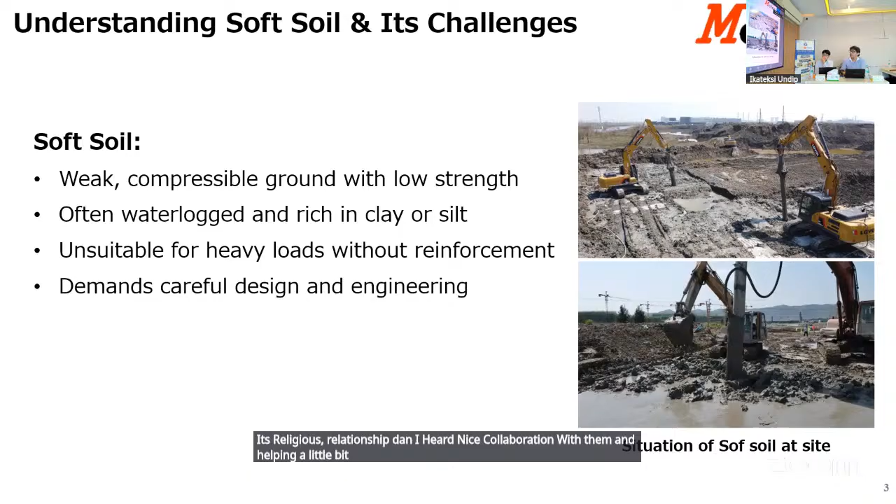And I heard from Beta, who are our nice collaborators and are helping us a lot, that Indonesia has a lot of soft soil all over the country. So we thought it would be a good opportunity to speak about it. Next, there are key challenges in building on soft soil. The first one, low bearing capacity.

And the second one is, if it's low bearing capacity and we build something, then there will be the settlement issue. And then there is soil instability. And of course, impacts on the construction.

There are many people from different companies, construction and consultants. I believe so. I hope so.

And there is a problem of cost. If the project is delayed, there will be cost overruns and durability issues, client issues, and issues with the people and society around. So we need to fix those issues so that these kinds of accidents don't happen on the site.

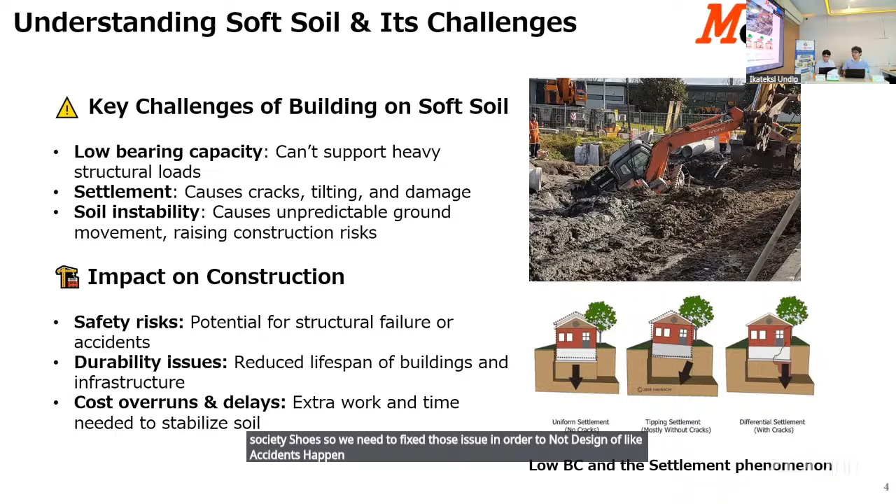Now we move to the DBox. So what is basically DBox? DBox is basically a reinforcement product to strengthen soft soil. And how it strengthens the soft soil, I will explain briefly in the next slides. It's basically binding the soil particles together.

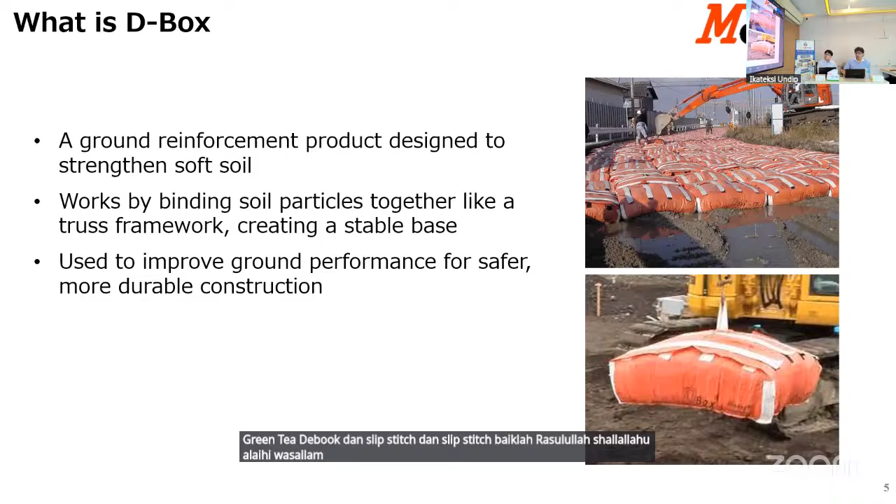The truss framework: if you see on the right side, there is a DBox being lifted by some equipment. There's a truss band inside, and it binds the material. And it's used to improve the ground for safer, more durable construction.

Then what are the sizes? There were many sizes before, like the L size and the S size, but now we mostly prefer the LS100 and LS150. The material is polypropylene, and the truss band is made from nylon.

As for durability, we cannot use it a second time. We can use it, but in Japan we don't recommend it because it will not be 100% efficient. It can be used at 80%, but we don't recommend it. We should use it only one time.

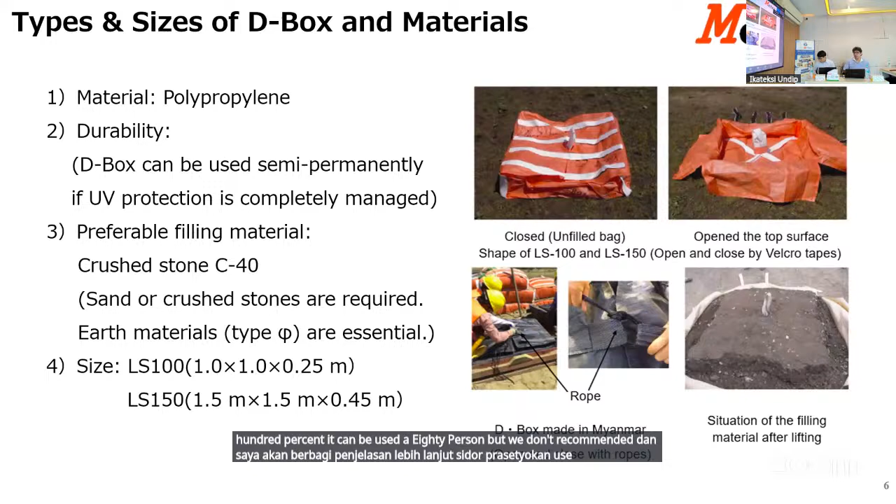And for the fill material, crushed stone C40, sand or crushed stone you can use. And the material is this one; if you look on your right-hand side, you can see it.

Then what are the benefits of the DBox? Basically, it's reinforcement for soft ground. And the important thing is it reduces settlement, and we can achieve the settlement very early. We can save time in achieving the settlement.

The other thing is vibration reduction, because there are many vibrations from machinery, from traffic, and earthquakes. So we can really reduce the vibration with the DBox. And if you have an earthquake zone, liquefaction happens: when the earthquake comes, the water comes out from the soil because of the weak clay. That can also be prevented by the DBox.

And then frost heaving, maybe you are aware of it, happens in cold areas when the season changes. I'm not sure, maybe you have cold regions in Indonesia. So we can also use it there for roads, embankments and retaining walls.

And one more important thing is it's environmentally friendly, because, as you know, there are many methods to stabilize soft soil: cement, PVD, but the cement one is not environmentally friendly and causes many problems. That's why we use the D-box.

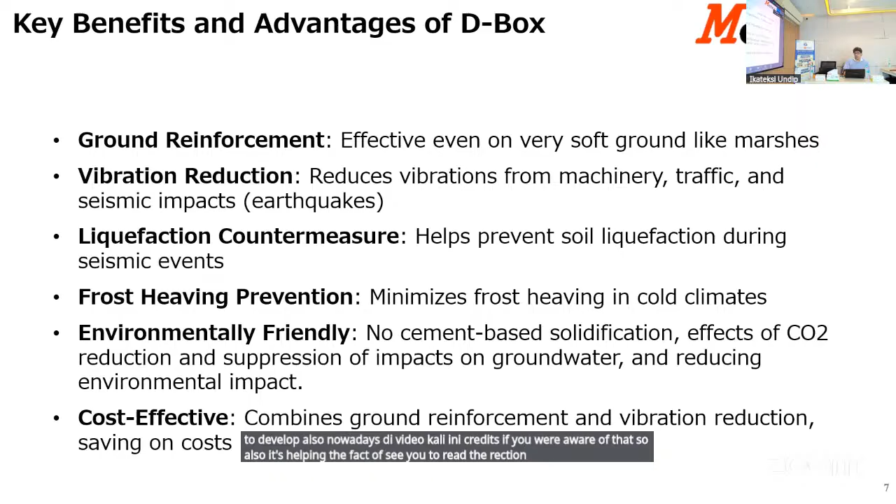Nowadays the world is focusing on CO2 credits, if you are aware of that. So it also helps with CO2 reduction. And then it's cost effective; in the long run, it's very cost effective.

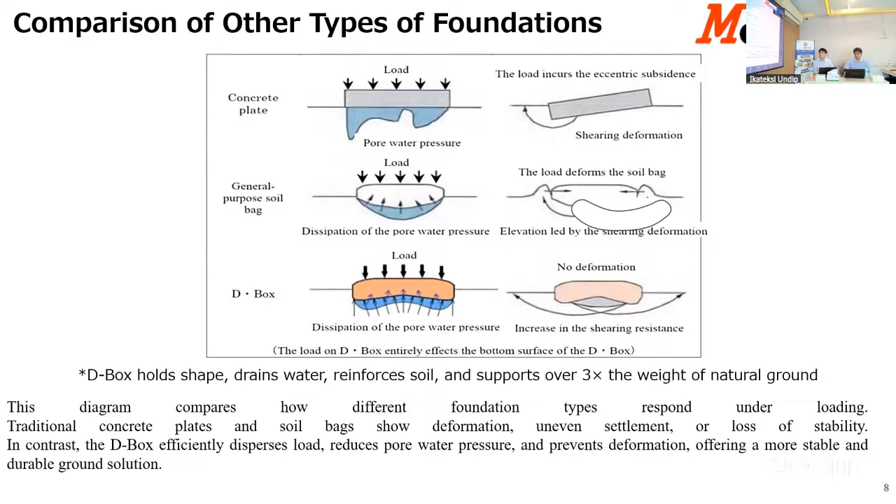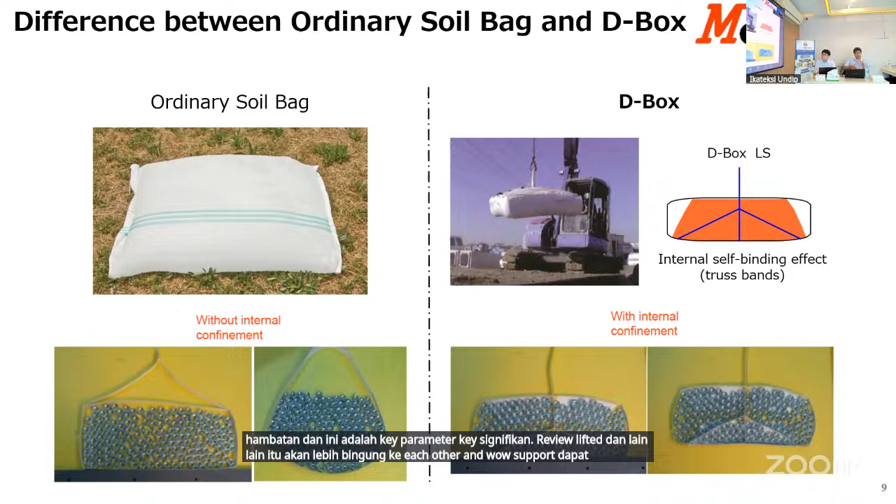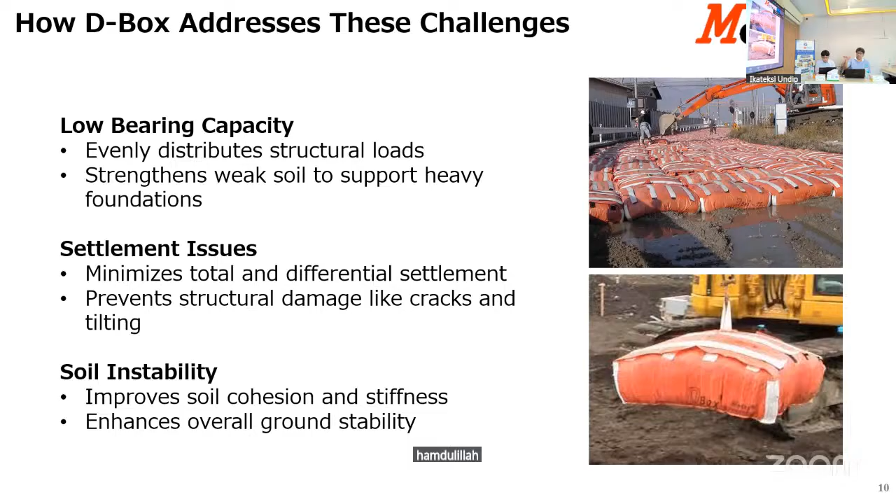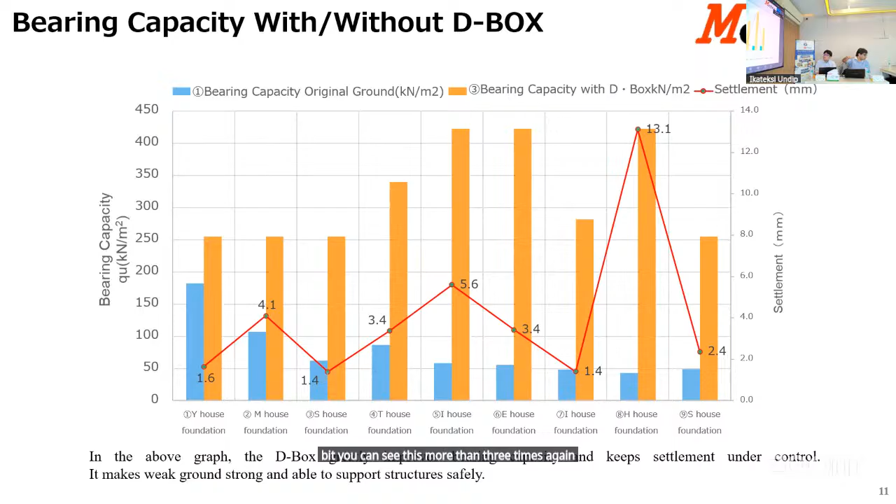Then technically, as I explained in the previous slide, if you see this graph, the blue one is the bearing capacity of the foundation or the ground before placing the D-box. And the yellow one is the bearing capacity with the D-box, QAD. So you can see that it's more than 3 times, somewhere it's 2 times, but the bearing capacity is very high in the case of house construction, like residential construction. So it's very good for house construction as well.

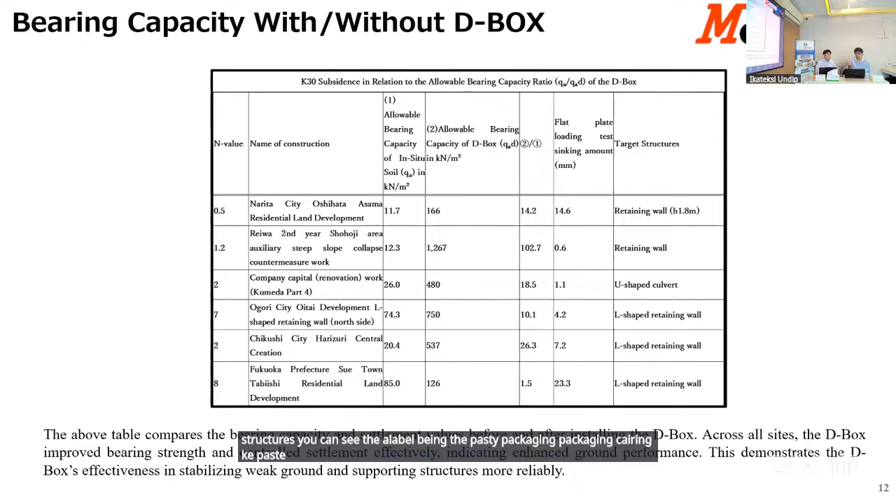And then another example, for the retaining wall or other structures, you can see that the allowable bearing capacity achieved is more than 3 times. So it's very good in achieving bearing capacity, and also for the settlement of the ground and supporting the ground. Then there are applications like road subgrade, parking lots, drainage channels, retaining walls, and water tanks. We can use a D-box there.

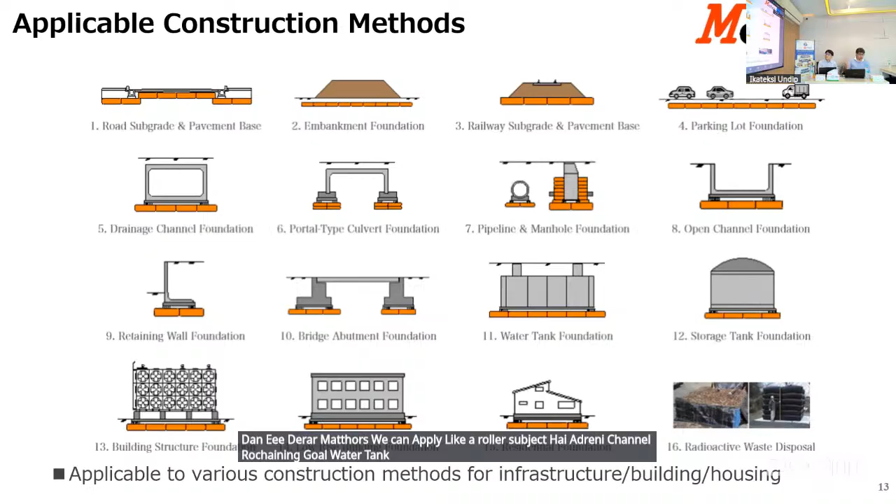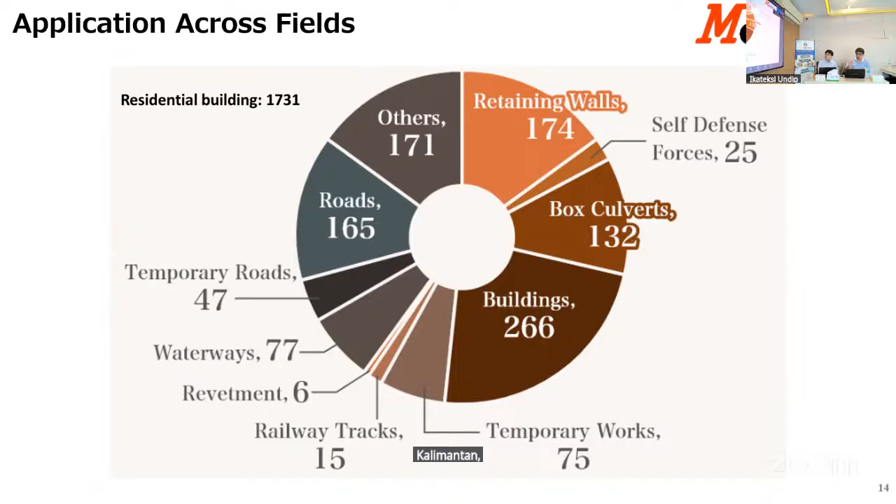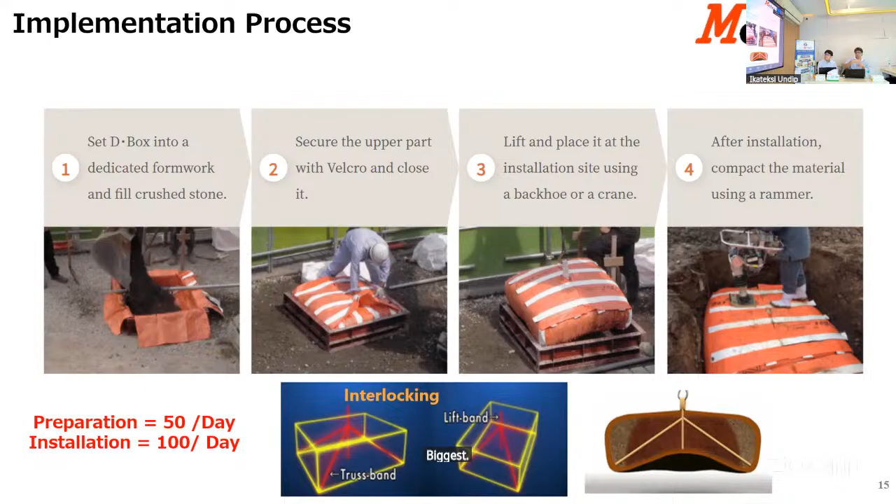And then how to do that? It's a very simple process compared to other methods, because those need a proper technician and proper teaching. But in this case, we just need a D-box, a polypropylene bag. Then we put the proper material in it. Then we grab it, lift it with the band, and then compact it. So the truss band will be there. Like this.

And then this is a small video for you. So please watch this. Maybe it's a recap. Can you hear it? No, sorry. What should I do?

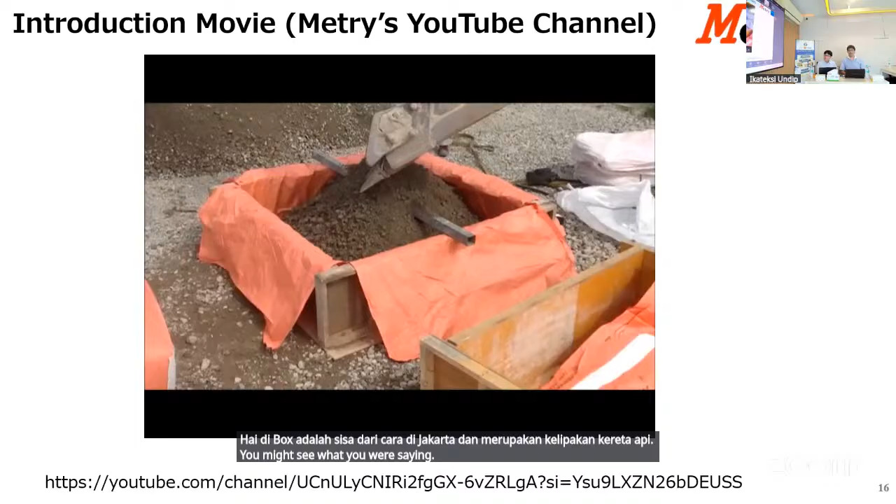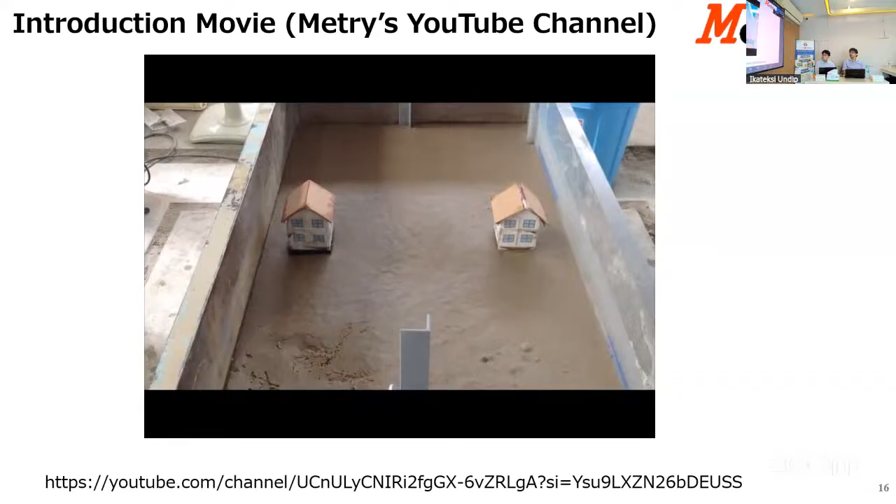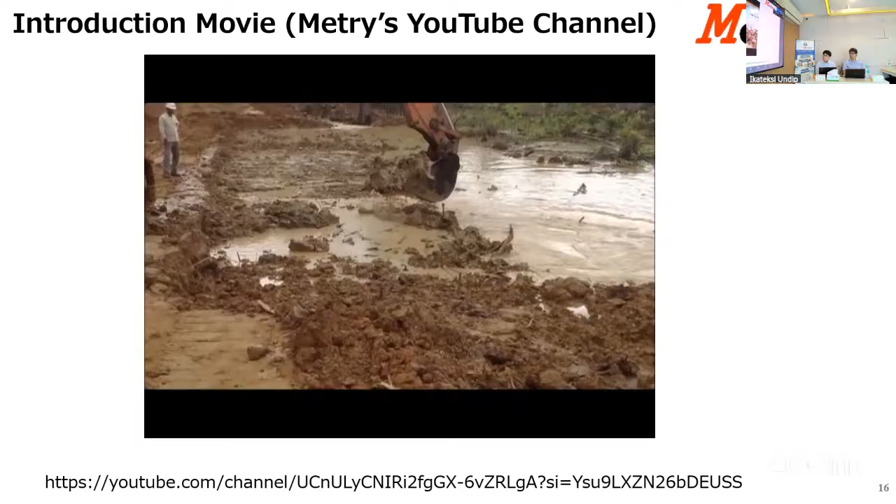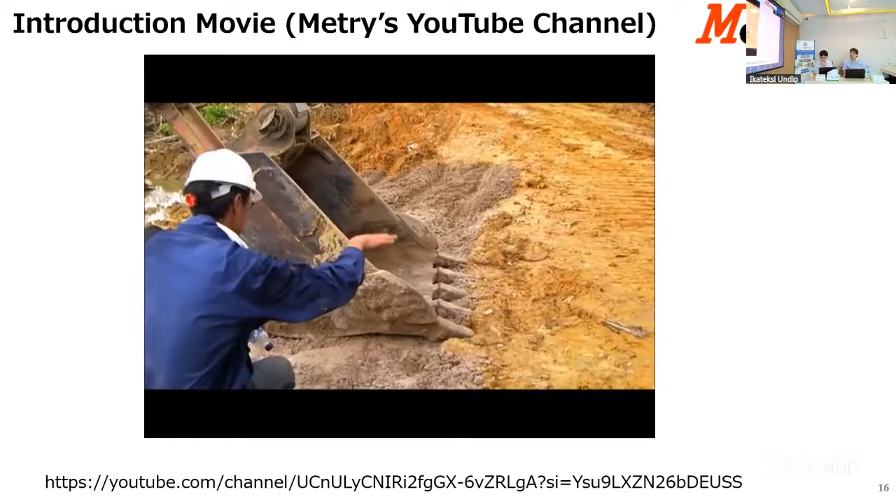You're on mute. Sound... no sound. Is it okay? Yes. Okay, sorry. I think you were listening to me, the online participants.

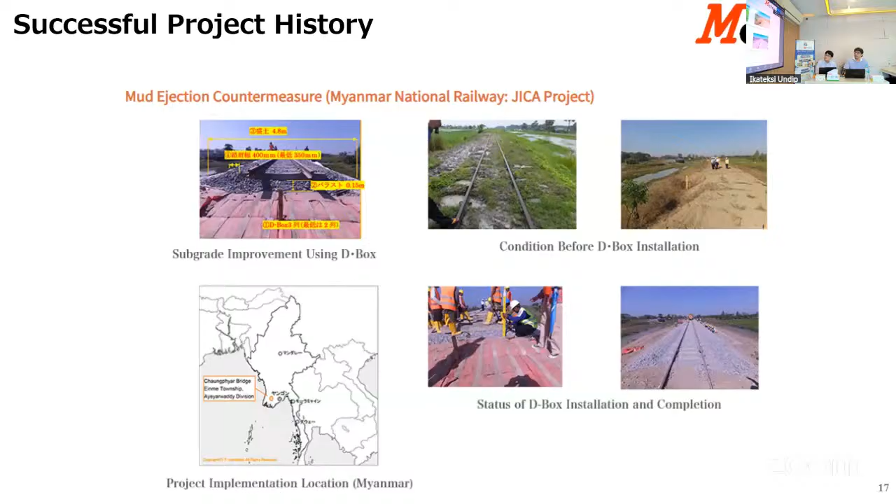So now I will present the successful project history of what Metry did. We have Myanmar, with the railway project we did there. And then, as I explained, we also did this project in Kalimantan. It's a short project, just 2-3 days in Kalimantan. And then there's ground reinforcement work using D-Box for the road base of a bypass highway on soft ground.

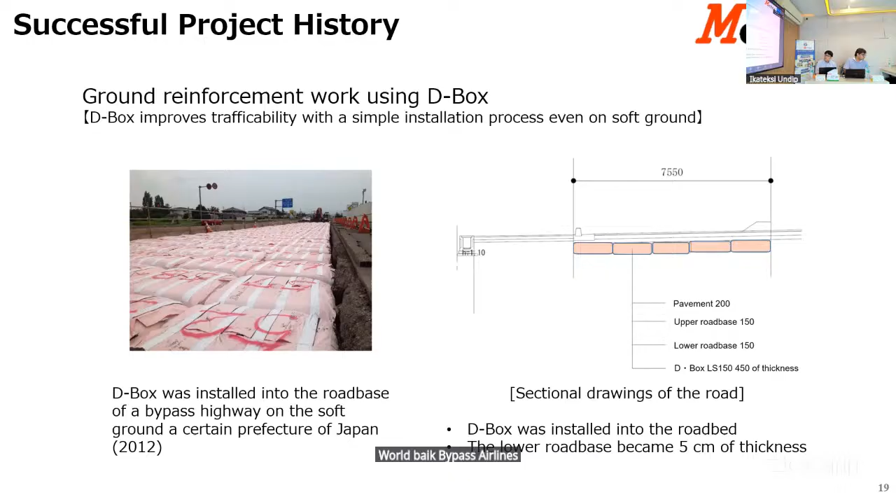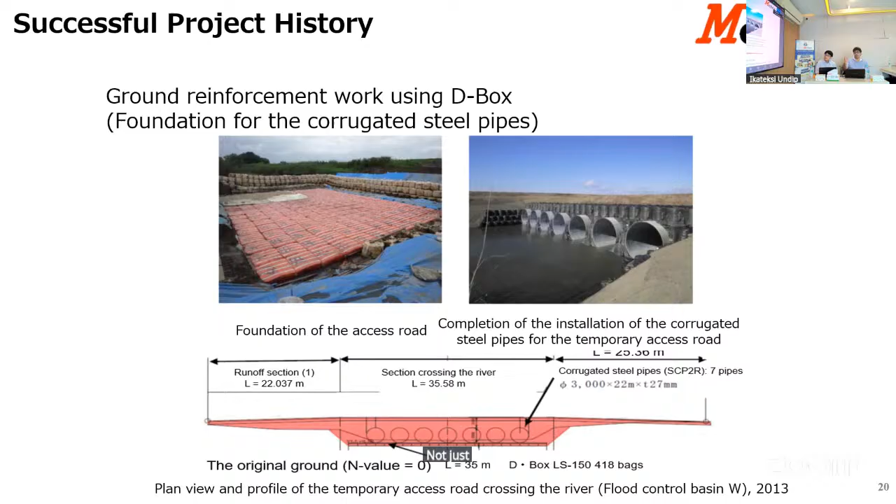It's in Japan. And this is also in Japan, using a D-box foundation for corrugated steel pipes. It was not so stable, so we used the D-box. And then, as explained before, to control vibration for the residential area and for the people, we use the D-box. It significantly reduces the vibration.

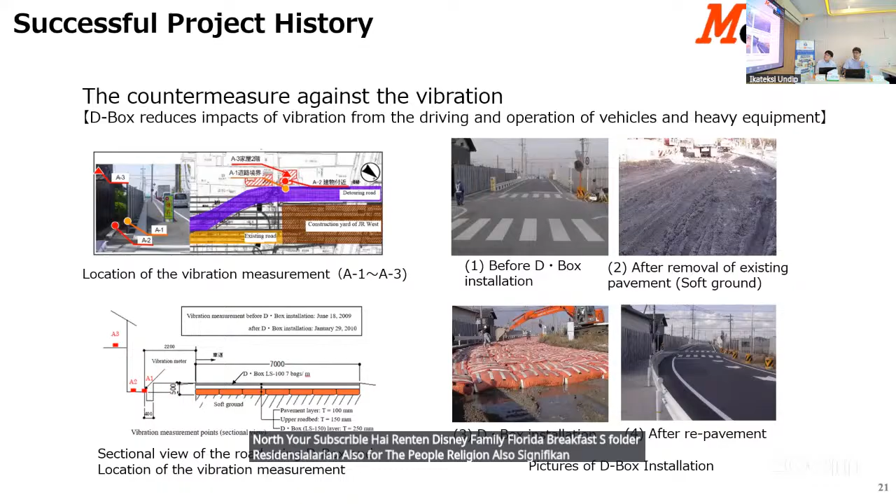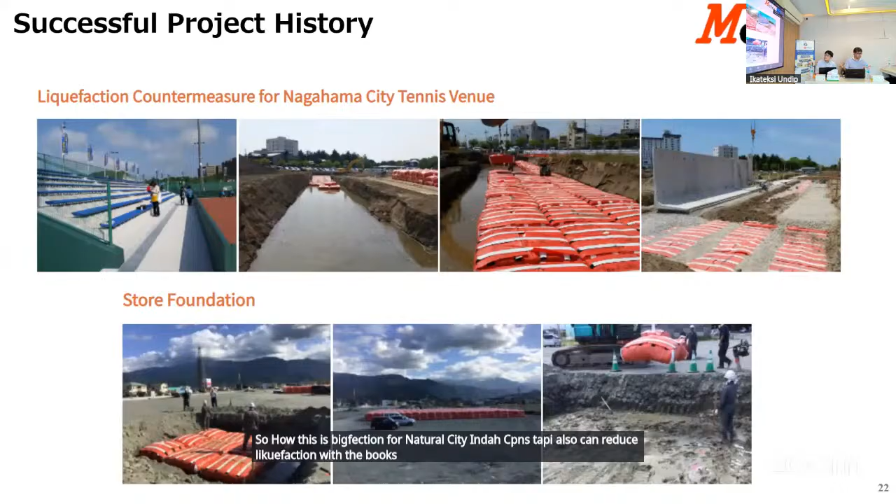So I studied from Nagoya University, in Aichi prefecture. There was some project there.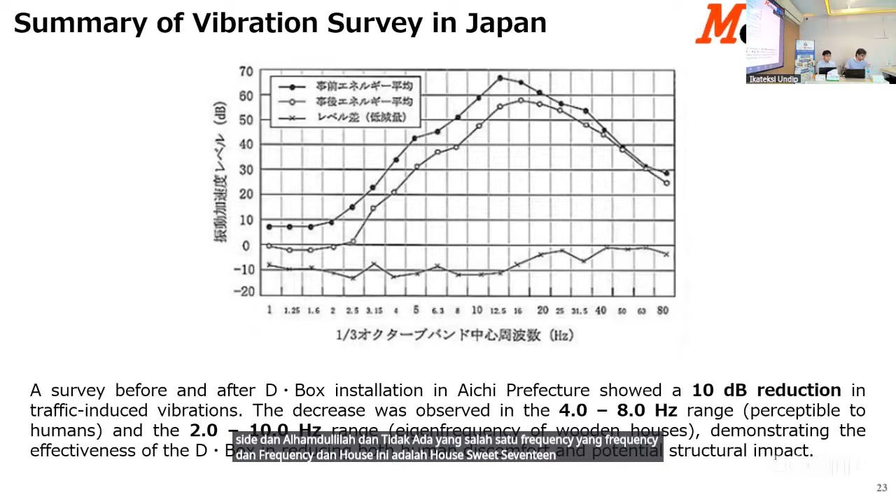When they installed the D-boxes, there was a 10 dB reduction at the frequency where humans can hear the sound - a very good reduction just from putting D-boxes in the soil. It also decreased the 2 to 10 hertz frequency, which is the eigen frequency for houses, causing them to vibrate and make sound. So this was also reduced. D-boxes are not just effective for settlement, they're also effective in reducing vibration.

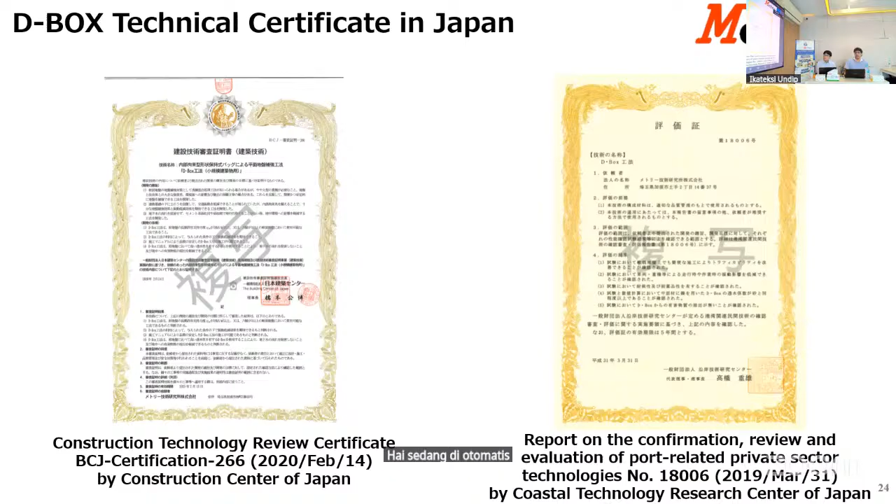And these are some certificates they got in Japan. Maybe you are more familiar than me with these kinds of certificates.

So that's it from my side. If there are any questions, please, anything is okay. Thank you so much.

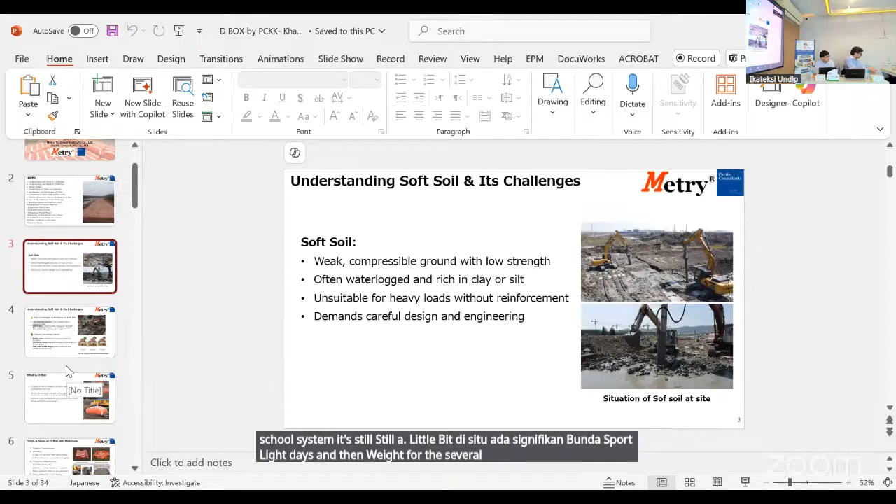So for the base soil, what do we need to do to it? We don't have to do anything - that's why we use D-box. We just put the D-box in the soil as it is. We don't do anything, because if we do anything, that defeats the significance of D-box. We just put it like this and then wait for the settlement, and we don't even need to know the parameters of the existing soil.

Of course we know the soil - we know the N value, we know the C value. If we know it, then we can apply this. We definitely know that, but mostly N is 0, 1, or 2. That's why we just put it as it is, and then observe the settlement.

So now we are working on Narita airport in Japan, the runway, and the total settlement design there is 4.62 meters or so, because it's very, very weak soil with a lot of water - 700% liquidity index they mentioned, a lot of water. What they suggested was cement stabilization, but the client said it's an environmental issue, so please use another method that's cheaper. In the long run D-box is cheaper, but in the short run cement stabilization is easier. Then they suggested D-box.

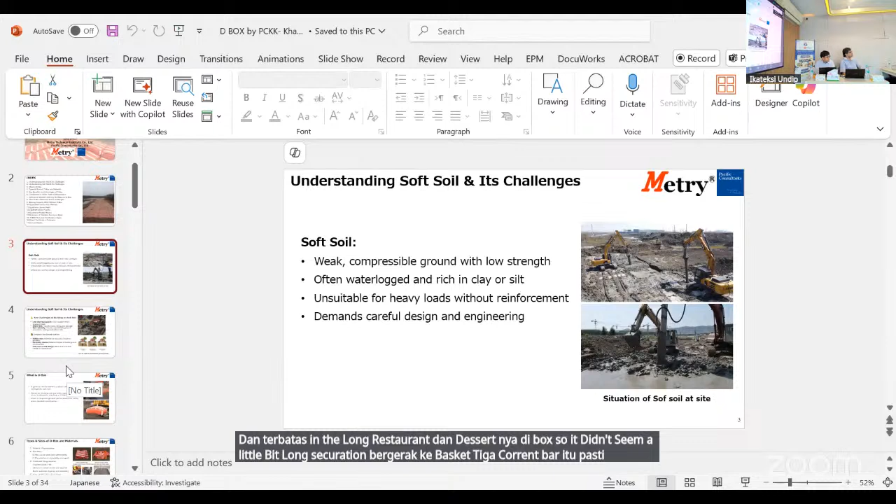It has a design we cannot discuss now, but 1 layer, 2 layer, 3 layer depending on the situation. If we put 1 layer, it gives bearing capacity 3 times the current bearing capacity. And if we put another layer, it will be more - that's the design calculation.

There's a question. Is there any requirement for material inside the box? And second, is there any pre-treatment for soft soil condition before we install the box? If any project portfolio in Indonesia would be favorable. How can I see the question? About the chat.

As I explained, there is a requirement like C40, it should be crushed stone 40. We cannot use clay, but there isn't a strict restriction - we have to customize according to Indonesian needs, but the time will be different. For example, with C40 it might need 1 day to achieve settlement, but if we use sand or clay it might need 3 days. So the permeability is different - we might need the same material, but we can go with sand and silt. That's something we have to discuss and customize according to Indonesian needs.

The second question was about pre-treatment. I think it's the same discussion we had - we don't need pre-treatment. It depends on the depth of the soft soil. If it's more than 5 meters, we go for pre-treatment, but if it's 3 to 4 meters, we don't need any pre-treatment. We can put it as is, whatever soft soil and however much water, we can go without that.

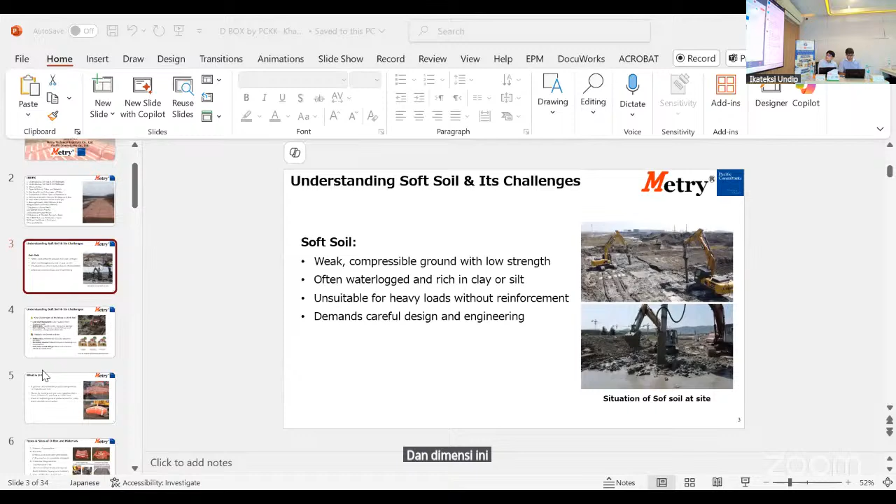It's a very easy way to make it. It's not a complicated technique. We need a D-box, and then we put the material, wrap it, and do proper compaction. That's it. It doesn't need so much labor.

There's another question. Is there any standard dimension of the D-box, or does it depend on the soil condition? The second question, is it applicable if we want to use D-box on a previously mangrove site?

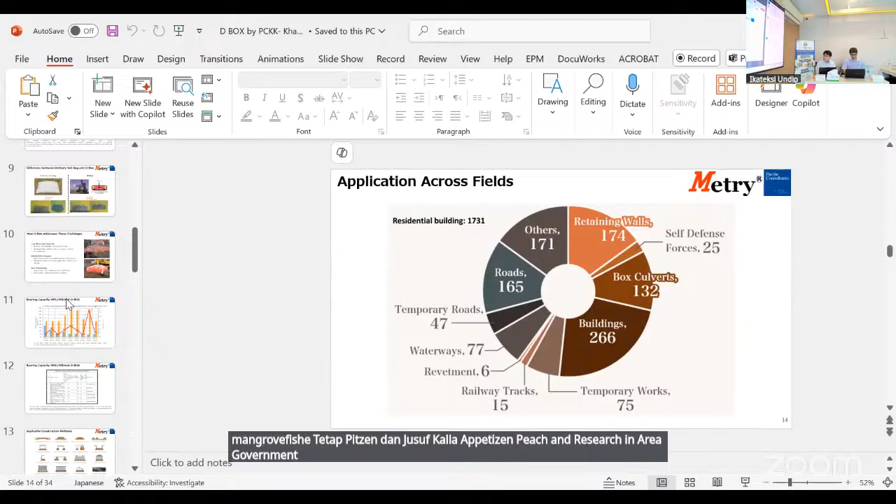What is mangrove? Mangrove is vegetation that usually grows on the coastline. A peat, you mean peat? Yeah, it's in the area. Different, yeah. Mangrove is vegetation that is on the shore. Rawa itu tanaman di rawa itu apa namanya? Very peat and very soft. Mangrove, tapi kan itu rawa kan itu. Tree on the shore, okay, yeah, tree okay, on the shore.

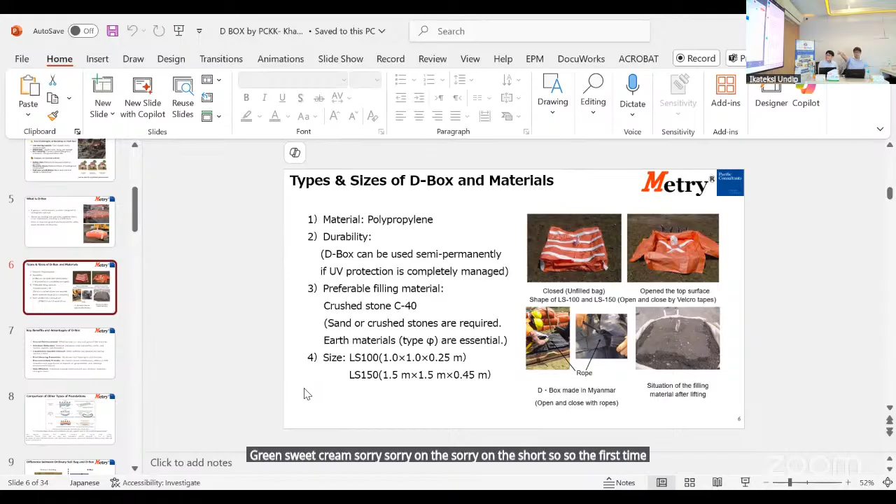So the first question, the answer is on the screen. We have proper size for the D-box, and mostly we use LS 150. If the site has an N value of 0 to 2 and it's very soft soil, it doesn't matter how much water content there is, it's okay. We can use D-box, but it depends on the depth. If the depth of soil is more than 5 meters, it's difficult. We need to think of another approach before we can put the D-box. Thank you for the nice question.

And the second one, about mangrove. Yeah, we can use it, as I already answered. It depends on the depth. If the depth of that soil is too much, like 5 meters or more, we need some protection. But definitely we can use that. This is probably related to mangrove.

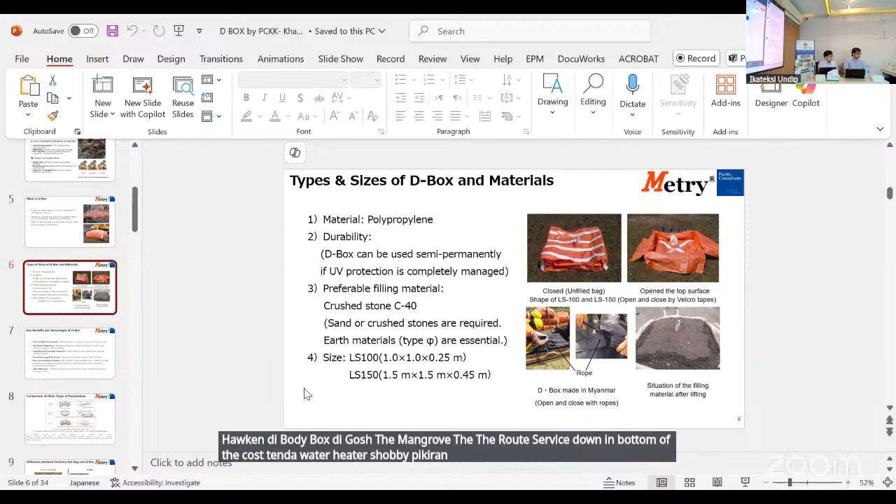If the mangrove is along the coastline, how can we put the box, because the mangrove root itself is down at the bottom of the coastline, and there's seawater there, so we cannot put it directly. So my understanding is the box has to be put on the prepared original ground. If the original ground is soft, then yes, we put it there, not on top of the mangrove. No, it cannot be like that, because if it's on top of the mangrove, it won't work. It has to be on top of the real ground.

So the limitation is the height, the height of the layer of the D-box.

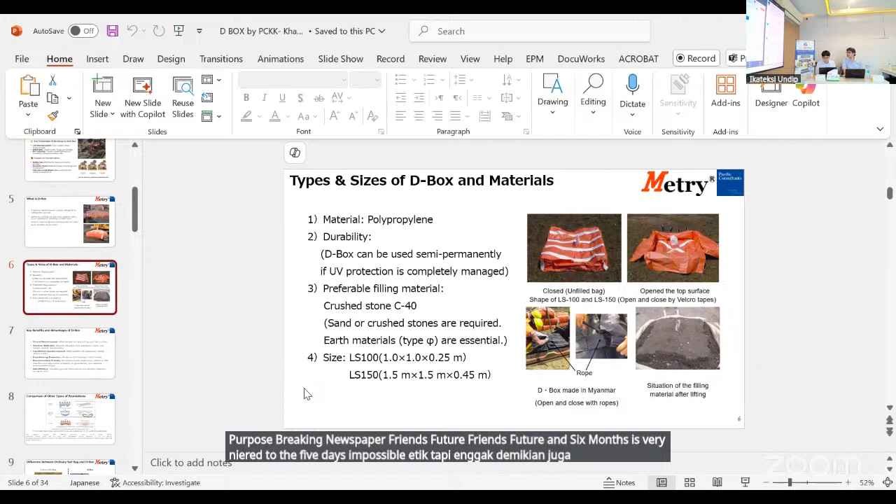It's an interesting question. In industrial or mine areas, is the box also applicable and preferred to be used for vibration equipment such as high pressure pumps, rotary kilns, crushers, etc.?

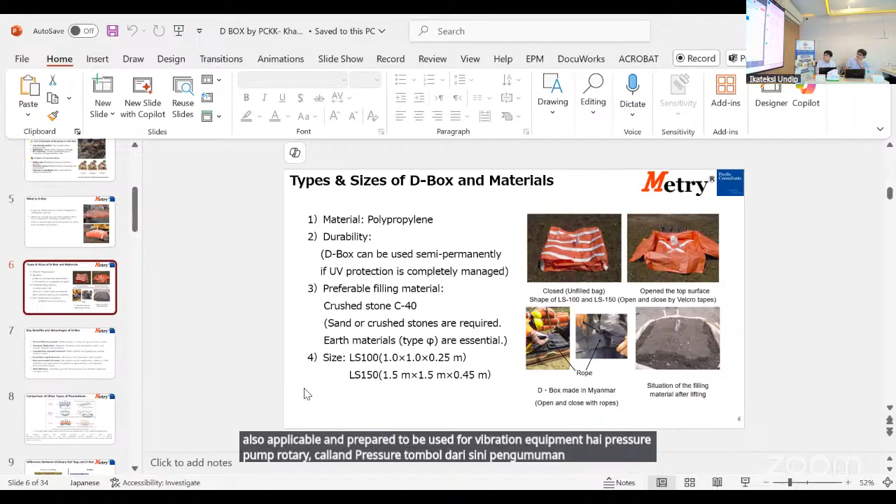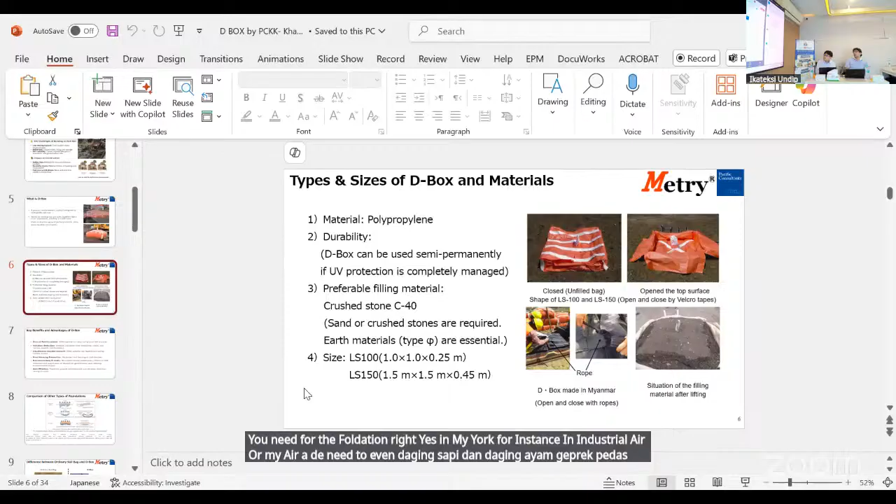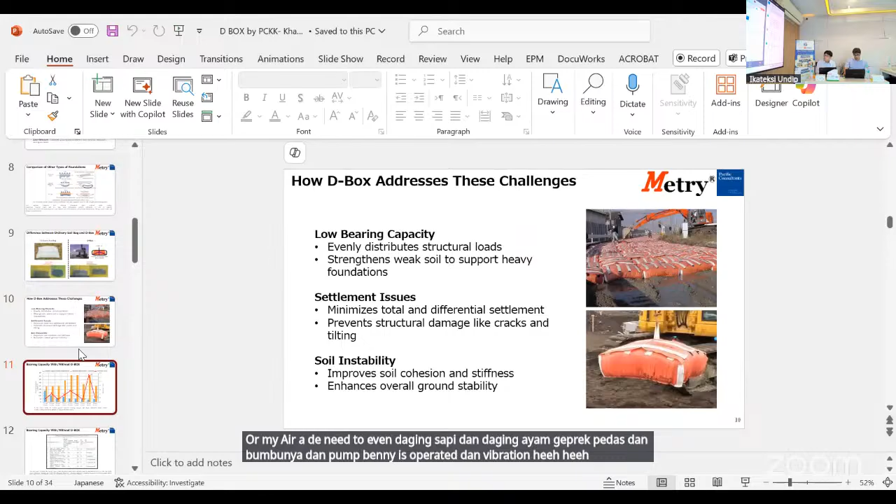You mean for the foundation, right? Yes, in mining areas. For instance, in industrial or mine areas, they need equipment, and the equipment itself, when it operates, will give some pressure or vibration, like a pump. If we have a big pump or several pumps, then when operated, it will make vibration. Is it okay if it's put on top of the box structure?

For instance, if the pump is operating on top of the box, is the box strong enough to support it during the vibration? Are there any damages because of the vibration, or can the box stand? I'm not sure about this very high equipment, but normally for the traffic, it's okay. But it depends how much it's producing, right? We need a calculation of how much weight is occurring.

Because if we have a very heavy truck running on the road, and it's the same weight and vibration, then it's okay for the D-box as well. But it depends how much vibration it's doing. But exactly on the D-box, of course, it's not possible.

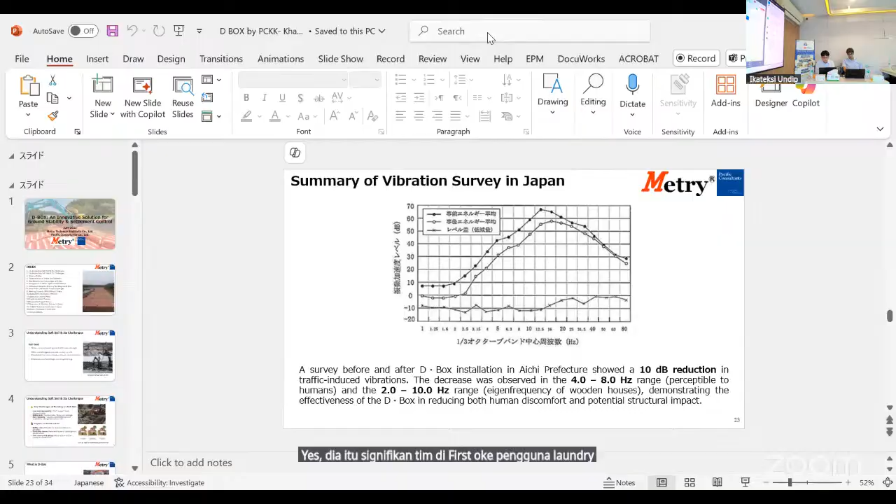In the road construction method, when comparing conventional embankment with the use of D-Box, is there a time difference or any potential advantage for the users? Yes. I have to show you that. Yes, there is a significant time difference. Allow me. Wait, please. If somebody has another question, please just type. Let me search that.

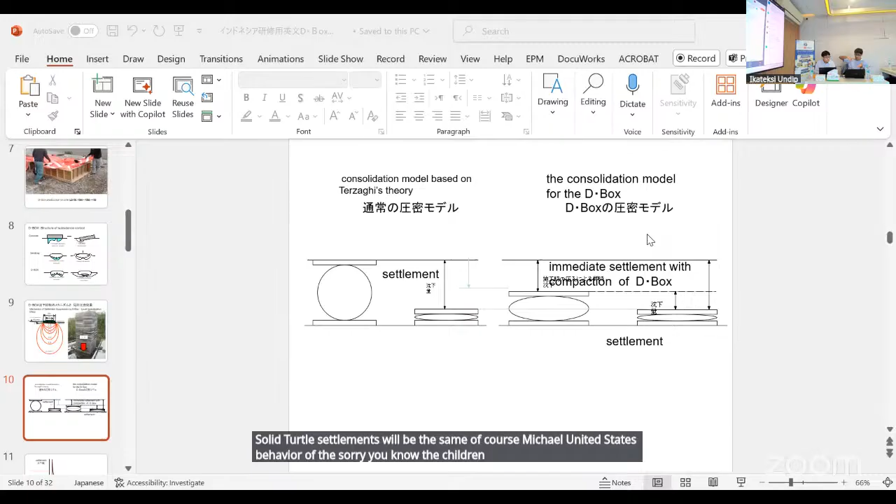I cannot show you the time here, but can you see my screen, right? So the left-hand side is the typical method for the plate load of Terzaghi theory, and on the right-hand side is the D-Box. So the total settlement will be the same, of course, because we need to achieve the settlement. We cannot change the behavior of the soil, but in order to achieve the permissible settlement, in case of D-Box, you can see that it takes a very short time to achieve it here.

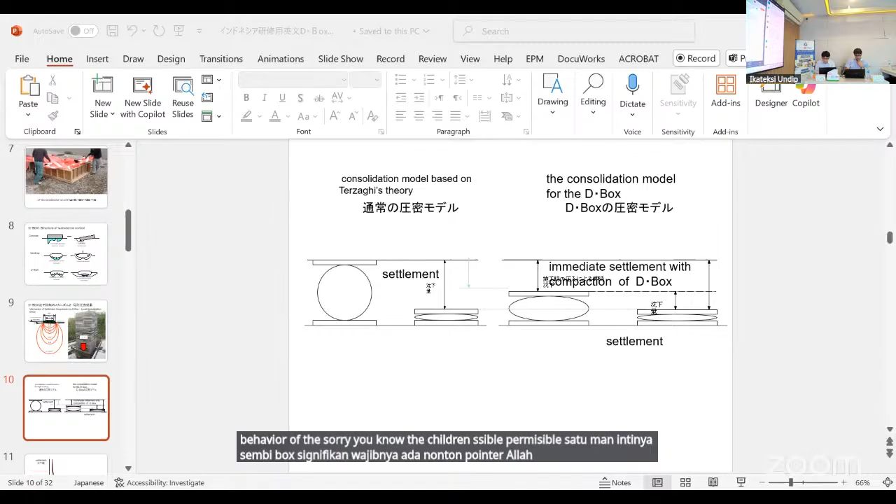I don't know if I have a pointer or not. How do you use a pointer? But it's not on the television. Okay. The light, you can see the red light. Oh, yeah, you can see this, right?

Yeah, so you can see here and here, there's a sudden drop in the settlement. So in the case of D-Box, we can achieve the settlement very fast. So this is the time difference, of course.

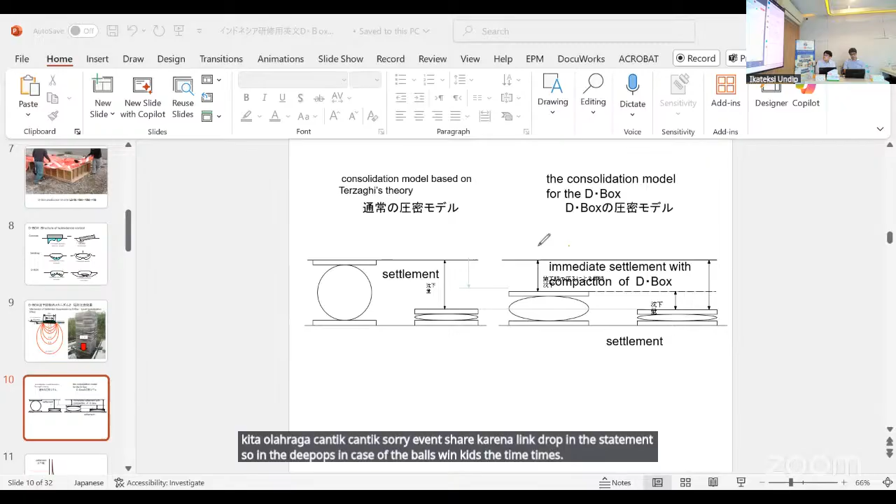Thank you so much, very interactive. So we get many questions from the people who are watching. Especially, I know, Pak Heru here. Pak Yuswal Subi is located in Kalimantan, Kalimantan Timur. And Pak Heru just told me that it has great potential to be applied in Kalimantan, where we need to work on soft soil.

Any question for the filler soil? The material. Any requirement? Yes, as I mentioned, C40 crushed stone. But we can use sand and silt also. What about density? Density of the material? No need for a certain density of the material, because it will compact itself once it is put in.

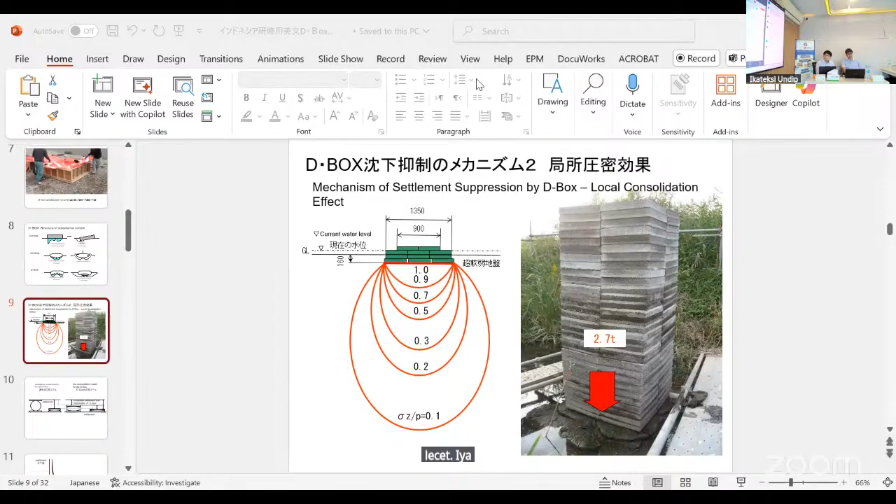So it's a very interesting phenomenon the D-box is following, and it's very surprising how it achieved the settlement very fast. So I think it can be used in Indonesia for some projects because you have a lot of soft soil. We have the problem in Japan, but not so much. But in Indonesia, all over I think is soft. So why not try it and see how it behaves?

At the start maybe it's expensive, but as I mentioned before, we need to make a manufacturing company here who can manufacture locally, and then we customize with local material. Then it's very, very cheap. And once we teach the people, I think it's not a big deal, people can do it by themselves.

What is the difference with geotextile? With this? Harrison, you need to answer now.

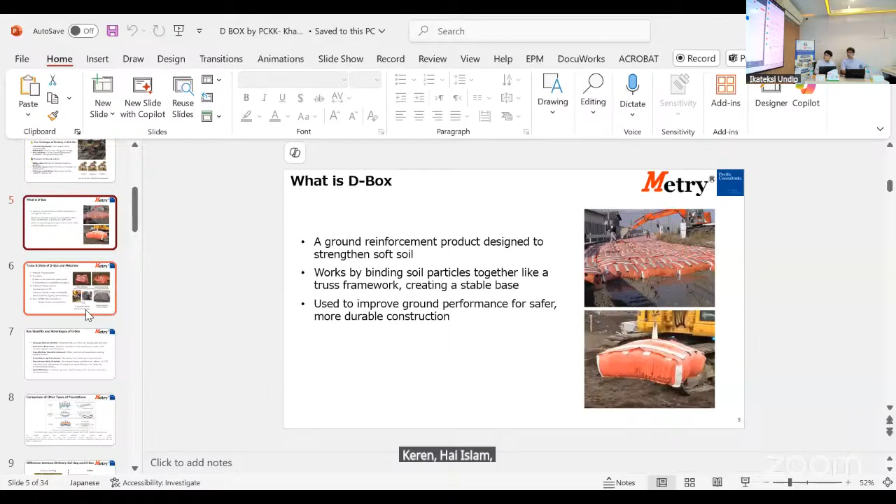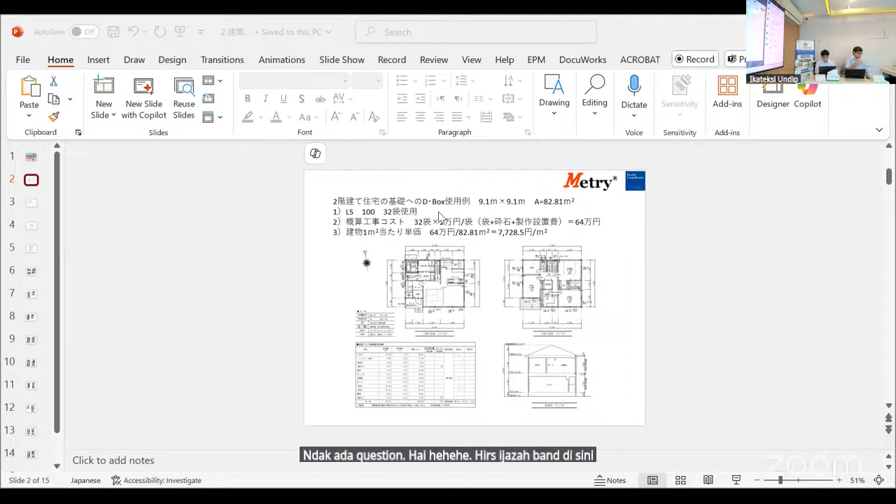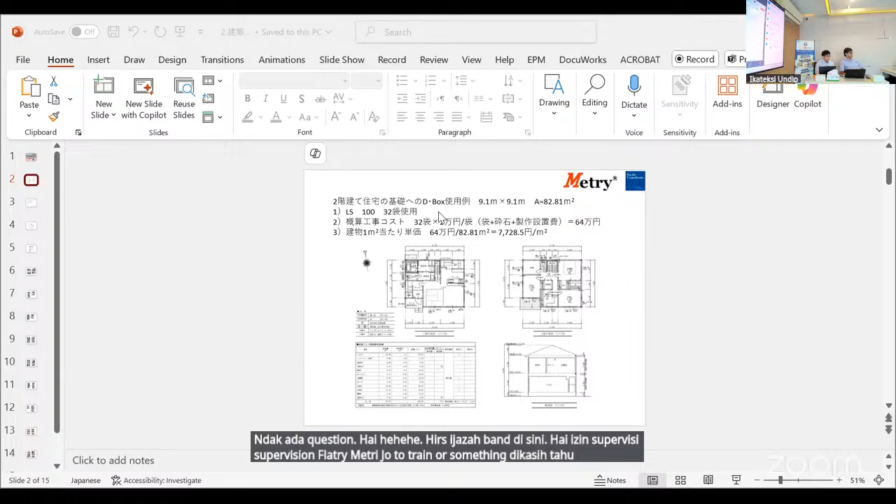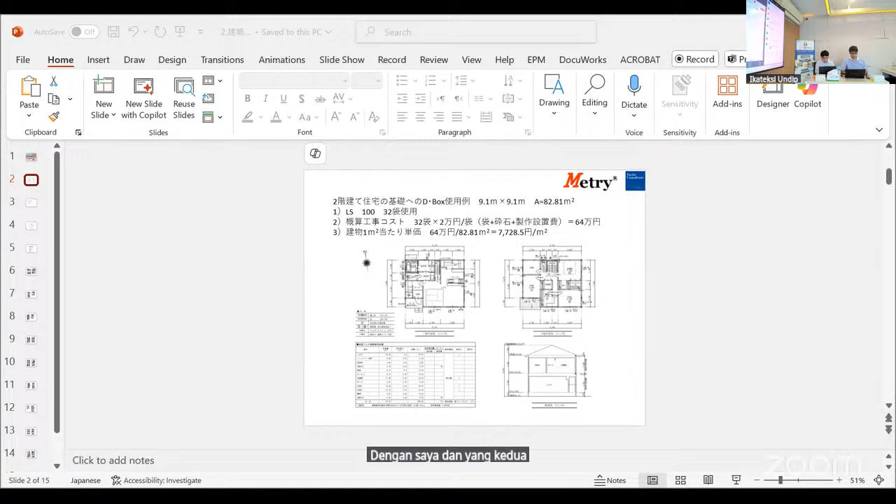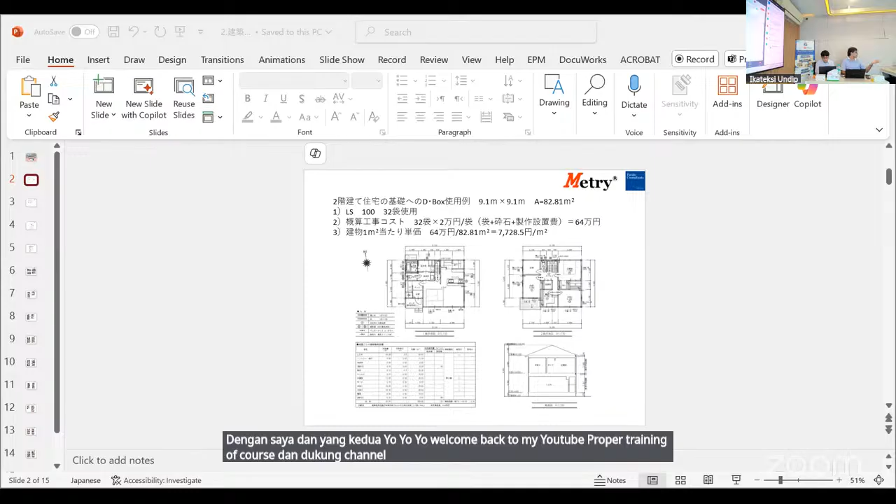The question is, probably you will say yes. When we apply this on site, is there any supervision from Metry to train or something? Yeah, definitely. Because we worry about the workmanship. You know, people sometimes just drop it or unintentionally cut the box because of something. They will do proper training, of course, and they can come here for 2-3 days. It depends on the schedule and depends on the contract, right? So yes, they can do that.

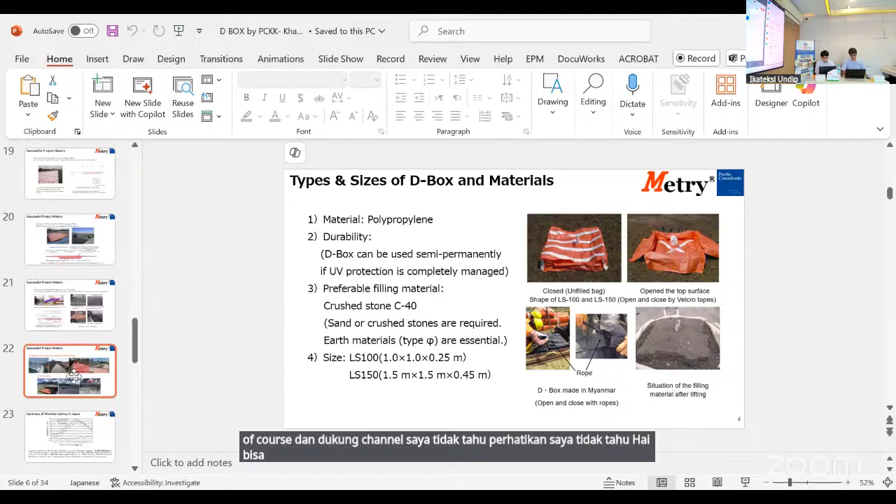As I mentioned again and again, the main purpose of the D-box is to stabilize the soil, achieve the settlement in an early time, and also take the load. But if you want to put everything exactly on the D-box, it's not designed for that, because the tire will punch it. What happened in Kalimantan, they just drove the truck on the D-box, and it's not working because it's not what it's designed for. That time training was only 1 day, and they went back and just drove the truck on the D-box. It was a bad experience in 2012, a misunderstanding in the application.